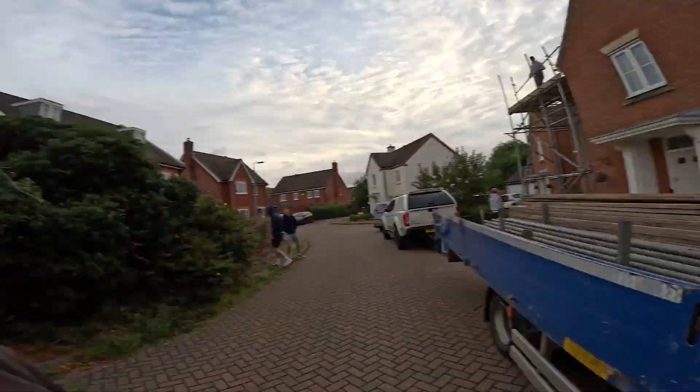But this one, I'll show you this one. So this house, quite a big house, but it's actually a timber framed property. So structurally, it's a little bit out there compared to what we're used to normally. But thankfully our engineer is fantastic and came up with a solution to utilise the existing structure, but we've got a little bit of messing around to do to get it to work. But what we'll do is we'll jump up there, we'll show you some before shots, we'll unload, and then we'll jump into the loft and try and explain basically how we're going to structurally convert this one.

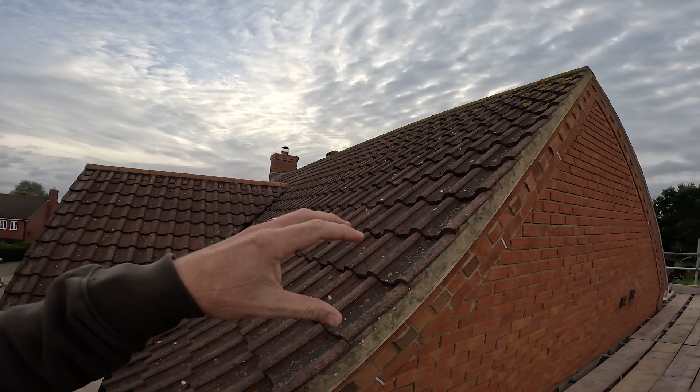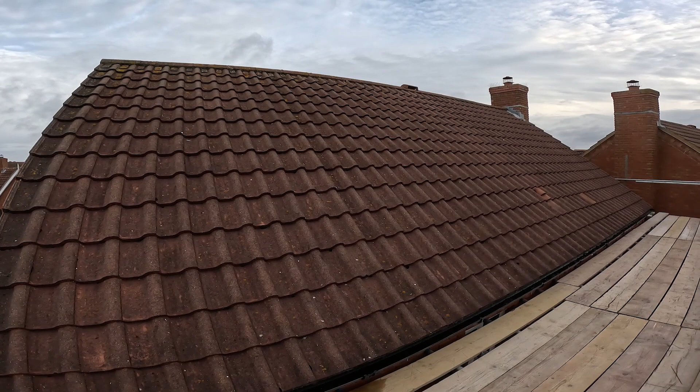So on this one we've got 2 pitch roof dormers, one either side of this apex, and then we've got a large flat roof dormer at the back. Wow, look at those gardens. Creating an ensuite, a master, a spare bedroom and a dressing room. And we've got a Juliet balcony as well. Okay, it's quite a funky tile then. But yeah, they're going to have these fantastic views.

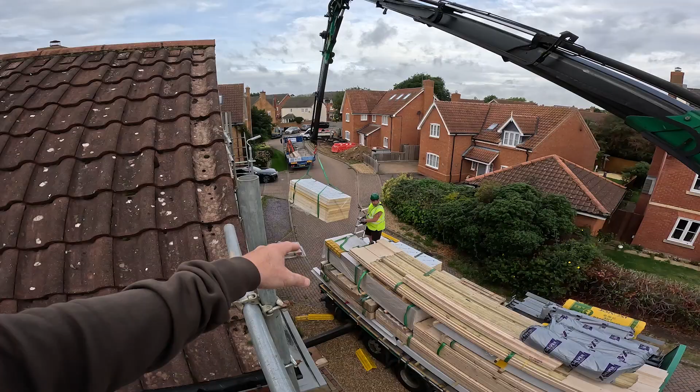So like I said, we're just waiting on Lawson. They just finished up the scaffold around this side so we can load it all up. But yeah, quite looking forward to this one. A little bit different structurally. There's our insulation, 150 PIR for the flat roof dormer. Scaffold's just getting finished off now. But what I'll do is I'll jump you inside and show you what we've got.

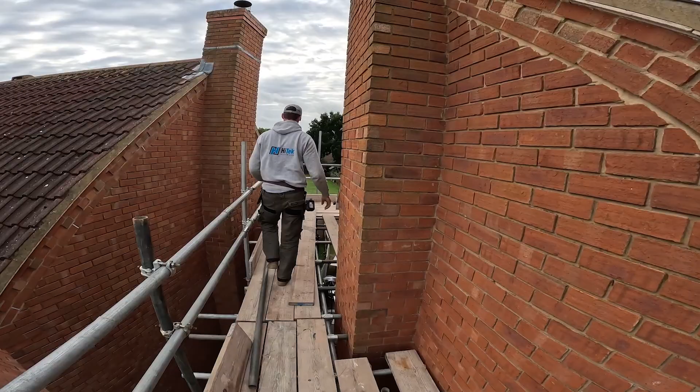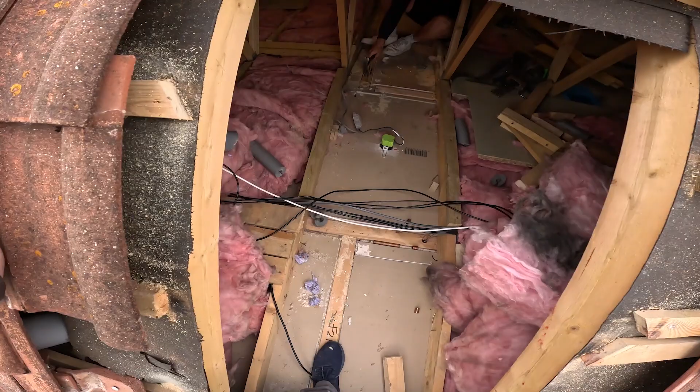So like we touched on earlier, we've got a pitch roof dormer this side and one on that side of the apex. And then if I walk around here, I will show you inside. So what Jamie's now doing is we're prepping this access hole. So we've got this main spine beam that's going to go along here. But because this is a timber framed house, we've got quite an unusual design.

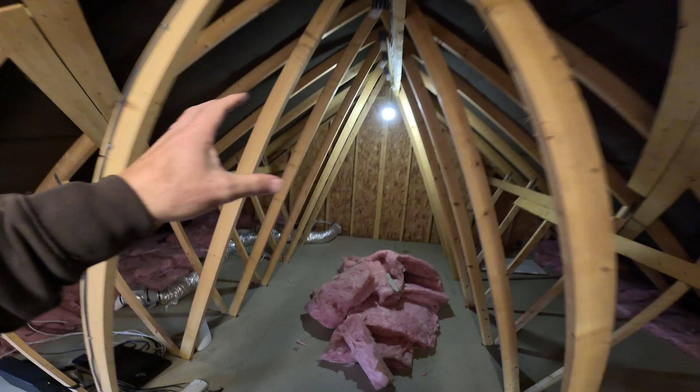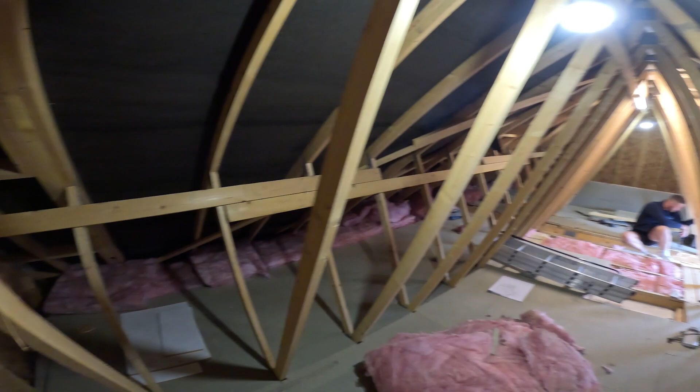So you'll see here, obviously we've got these timber strand panels. Now, traditionally, you wouldn't have these unless it's a timber frame property, but modern day properties now, they've resorted back to that. So instead of having block work, they're putting these back in and then doing brickwork. But then underneath it is solid masonry, so then we can still utilise it. But this one we know it's timber framed because we've fully investigated downstairs. But it looks very much like a normal loft up here.

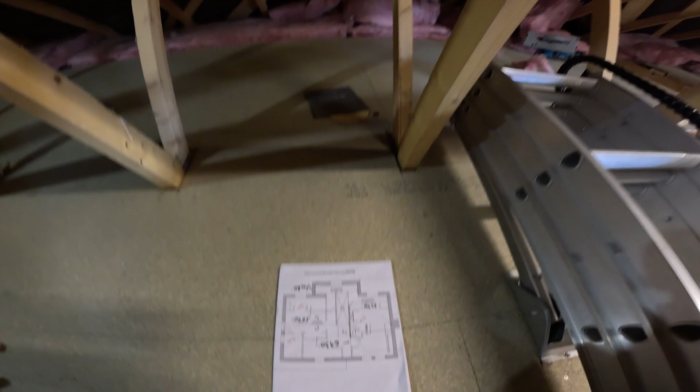But basically, because we've not got brickwork, breeze block or masonry on the sides or the front and back, it obviously creates a bit of an issue with us trying to put steels in and pinpoint loading and stuff like that. So what the architect has come up with alongside the structural engineer, more importantly, on this build, is a fantastic design. So if we're looking at it here, this is that front apex. This is that main spine beam that I'm referring to. So it's quite a chunk of steel, but this wall here, the one Jamie's prepping there, is basically going to become a load bearing wall.

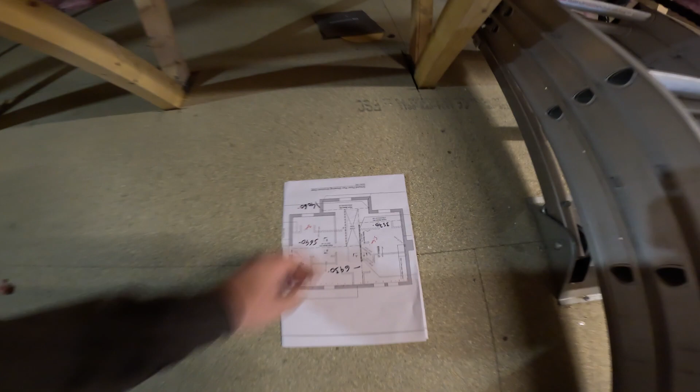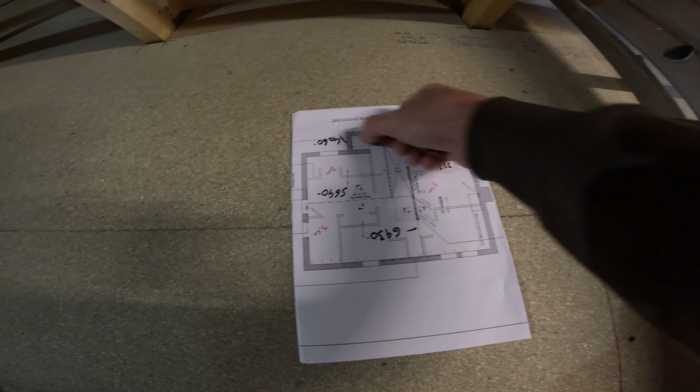So we've got to take the plasterboard off downstairs and clad one side of it with 18mm ply just to give it some rigidity. But the purpose of that then allows us to spread some of the weight along this wall, as well as then using big spreader steel. So normally we'd have like a spreader plate that'd probably be like 500 wide. In this instance, we've got like a steel that's like 3 meters. We've got one there, but then we've got these other spreaders that go there as well. And that allows us to just dissipate.

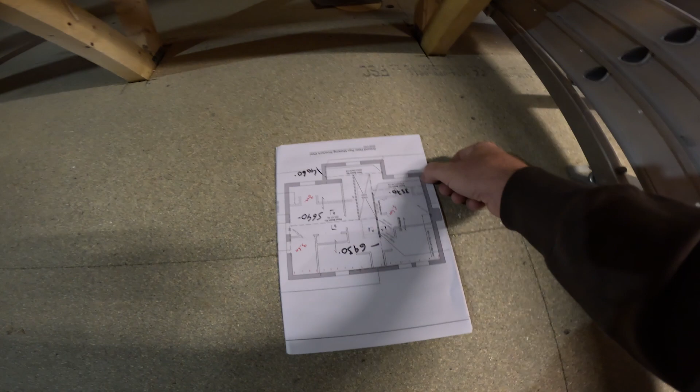Move the loading across multiple studs. That's probably the better way of me saying it. So effectively, instead of us point loading all the weight onto like one stud, that allows us to spread the weight over like 5 or so studs, especially more so here and there and then there. It gives us multiple areas just to spread the load in.

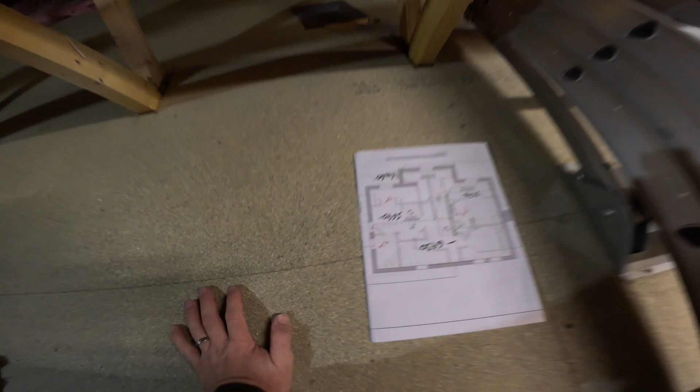And then once we've got these sections in, we're then kind of back to a traditional loft in the sense of we've got a ridge beam. We have posts either end that then sit down on these new longer spreader beams. So these are just bits of C-channel that have all been designed to carry over multiple studs. We've had to make a few holes downstairs to investigate like what the condition of the studs are, what the centres are, and what the thickness is.

But yeah, so that is what I was just showing you, that load bearing wall. But what we're going to do is we're going to lay a 3x2 on top of that, just to pack it up so that it's like 50mm above the plasterboard, just to minimise damaging anything going downstairs, just to try and minimise it for now. And then if you can imagine, the steel will run from there back, but we've got a long spreader beam that's going to go there that will connect on.

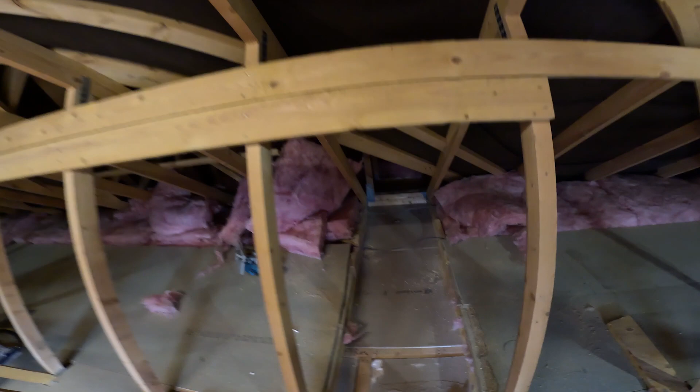This end's a little bit more tricky because we have got one that's going side to side, which is in that front apex, but because we've got this large girder truss here, we're going to have to cut through that girder truss. But by us packing this up 50mm allows us to keep 50mm of that girder truss in there. It's not obviously as strong as it is now, but it's going to give us some rigidity.

But the plan of action is if we get that side apex one in first, we can then put some struts up off that steel to support that front apex, which will then in turn allow us to take some of the weight off it and cut through that. So it's just a process of elimination in the sense of transferring the load onto the new structure.

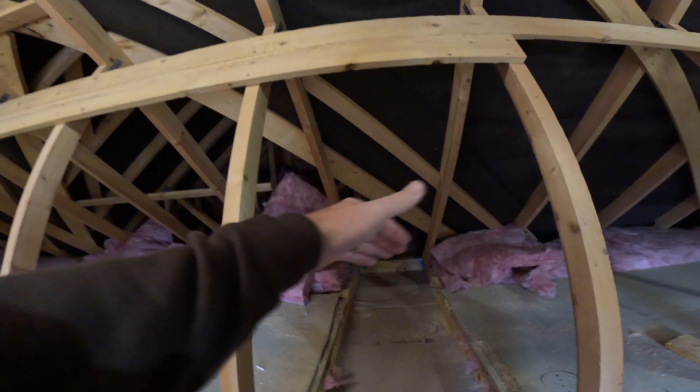So if we can get that steel in, the main one, and then that side piece in, that will allow us to get these dwarf walls in, which then in turn allows us to take some of the weight off the roof. So it's all staged in such a way, whereas in an ideal world you had no roof here, you put steels in and crack on, but we've got to be conscious of the existing loading and the existing weight of the roof, because not only do we not want it to drop and just aesthetically change, obviously from a structural safety point, if we start cutting out these trusses, the loading can just drop and move and the whole roof could collapse. So we've got to be very careful and very strategic in how we manipulate it.

Same thing with getting the ridge beam up, we won't cut out a massive amount of trusses until we've got the ridge beam up, because that takes over some of the weight. So it is very calculated in what we do. As much as it's great having a set of plans, showing you what the finished product needs to be, it's the journey of how we get through that, and that's what I'd like to think as a specialist we specialise in, is getting that journey through and doing it safely and avoiding the roof sagging, but on top of that getting everything as low as we can to give maximum head height.

So back outside, just talked you through everything that we've got over there inside, so we're now just getting the materials offloaded so we can get access to these steels. So we've just had the plasterboard lifted up, which is nice. I bought some brand new tarpaulins that are down there that we're going to put on there, but now we're releasing to get into some of the steels so we can start getting them up basically. So I think we're going to restack this decking so that it's in a single thing so we can get that up here. But yeah, so we'll leave the lads to it now, let them crack on.